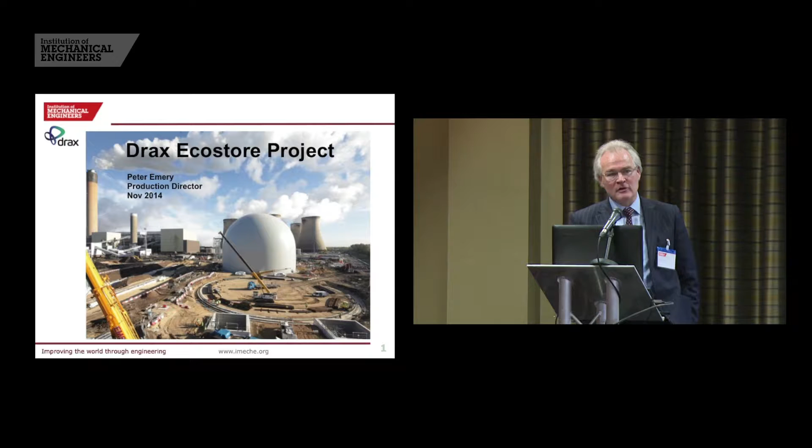So, a little bit about Drax as background. I started in 2005 because that's broadly when we really started the biomass journey. For those who don't know, Drax has 6 operating units, all 670 megawatts, making about 4,000 megawatts in total - twice the size of the next largest power station in the UK. In 2005, that was about 5% of UK's installed capacity, but because the station is competitive and efficient, it actually produces between 7 and even sometimes 8% of UK power. When all units are burning coal, it burns 10, sometimes 11 million tonnes a year, which in winter is 250,000 tonnes a week. CO2 emissions are between 22 and 24 million tonnes a year, and in 2005 that put Drax in the top 5 CO2 emitters in Europe.

As mentioned in the introduction, we floated the business in 2005, so we had to have a plan about what to do with CO2 when you've got a problem that big. We developed a business case for decarbonisation, which came down to a 3-phase strategy to deliver progressive reductions. The first was to improve the efficiency of the operation as best we could. The second was to progressively switch to renewable biomass from coal. The third was to explore the potential for carbon capture and storage. The plan was deliberately simple, and it largely remains intact today, 8 years on.

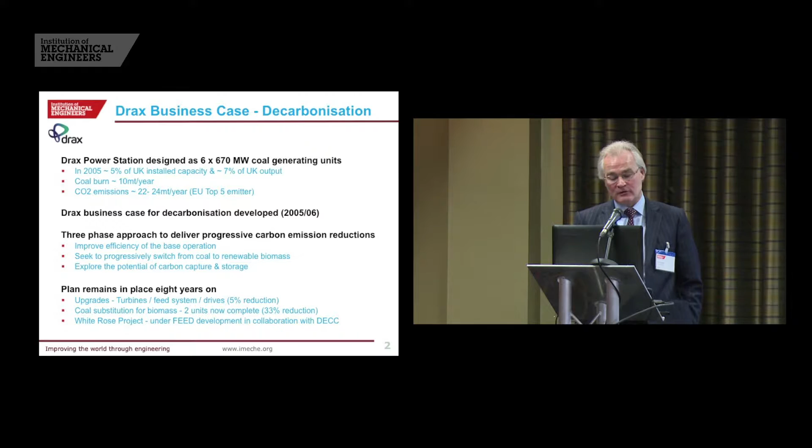Broadly speaking, that was our approach to trying to reduce carbon emissions, and we've had quite a lot of success. What I'll focus on today is the biomass piece of this.

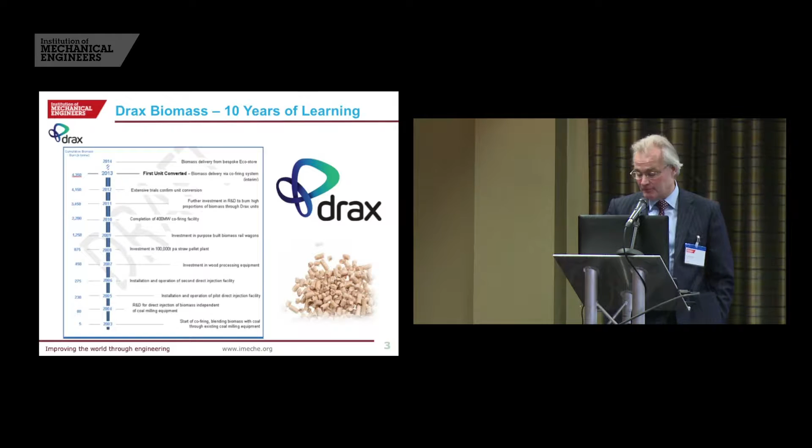So that's our experience on site prior to this project. In addition, Drax has also been involved in the supply chain. One thing about biomass is this is a relatively new business. There's very few people we can go to who've got a lot of expertise in this area. We're having to go to different people with different expertise in different industries, apply it to our own knowledge, and then build up a larger project.

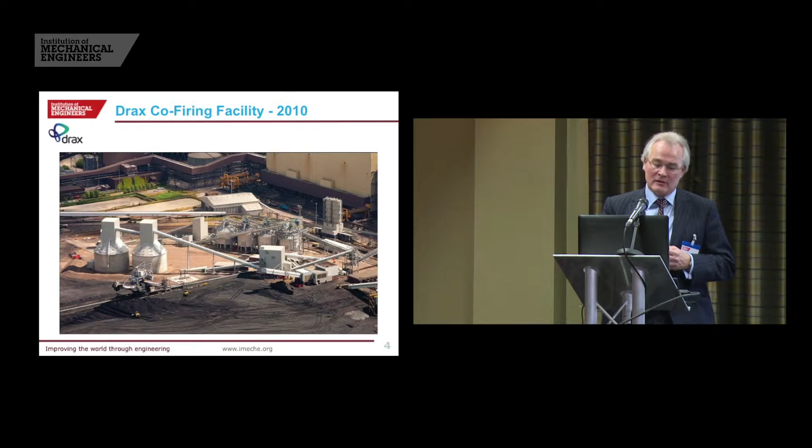Some of you may be aware that we are in the process of building 2 pellet plants in the US at the moment. In fact, we're commissioning one now. We've built a port facility in the US at Baton Rouge, and we've also collaborated with 3 ports in the UK to put in port facilities. Our expertise is a mixture of doing it ourselves and engaging in long-term collaboration agreements and contracts in this area, and we've learnt a lot from getting involved in all aspects of the business.

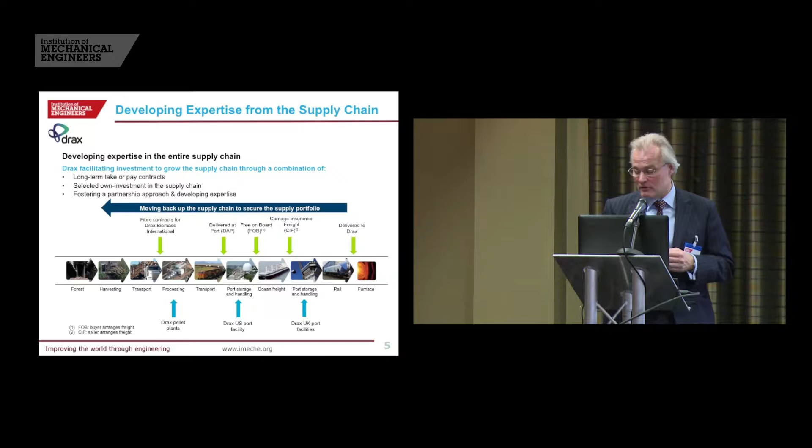The project is laid out fairly simply. We've got brand new rail receipt facilities, and we upgraded our entire rail network on site to do that - that was 8 kilometres of track. We've got a screening building which screens using magnetic separation and gravity separation. We've got then the 4 domes for storage, 75 to 80,000 tonnes for each dome. And we've got the retrieval facility taking it to our fuel distribution system. The rail loading and storage is all done by conveyor because of the capacity.

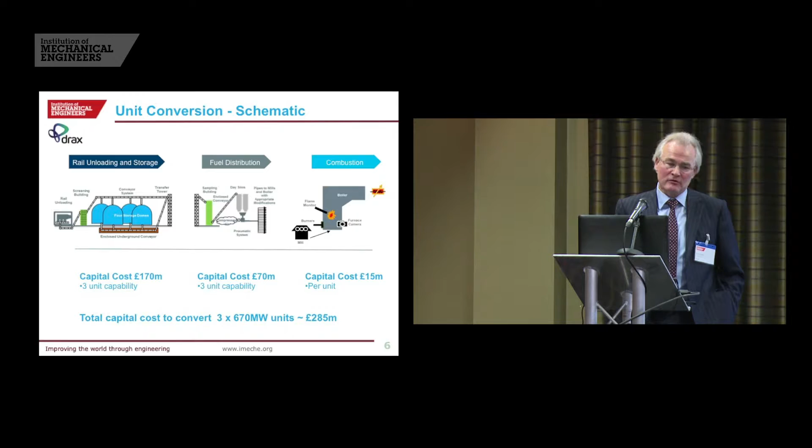The fuel distribution system effectively samples it, delivers it into day silos, where it then transfers to a pneumatic system for dust management, and from the pneumatic system it's then delivered to the boilers by pipe. Then it goes into the boiler, and we've had to do quite a lot of modifications. The capital cost looks small, which it is, but an awful lot of engineering time and effort has gone into making these changes not only effective, reliable and safe, but also improving the efficiency of the plant, because it's not designed for biomass, it's designed for coal. The big difference, apart from the particle size, is coal is delivered often wet and biomass is dry, so the heat integration issues are significant.

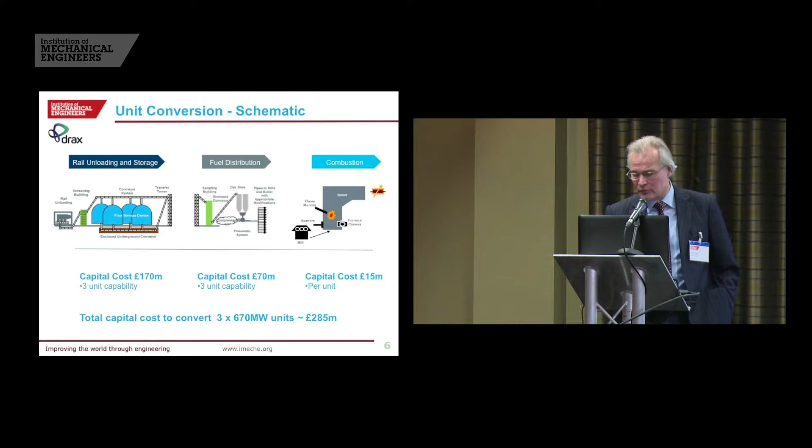To give context to the size of it, that coal stock - typically we operated between 1.5 and 2 million tonnes of stock. It actually did peak at 3 million tonnes in 1984 during the miners' strike, but typically it's between 1.5 and 2 million tonnes. So it is a large area, and that's been very helpful for us in developing the biomass project.

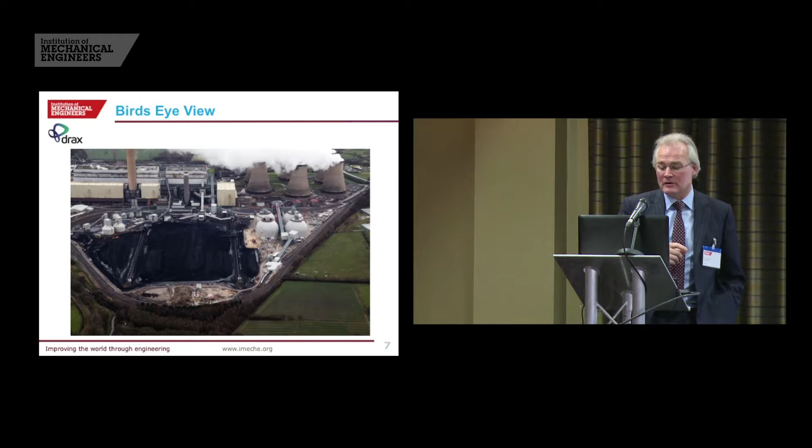So let's just look at the conversion plan and how successful it's been. This is the plan of the entire 3-unit conversion. We're now really 2/3, maybe 3/4 of the way through this.

We converted the first unit in April 2013. The second unit we converted in April this year, and next year, probably the middle of summer, we'll convert the 3rd unit. So we've commissioned all the common systems, that's now in place, and we've converted 2 units. And the project has been a success.

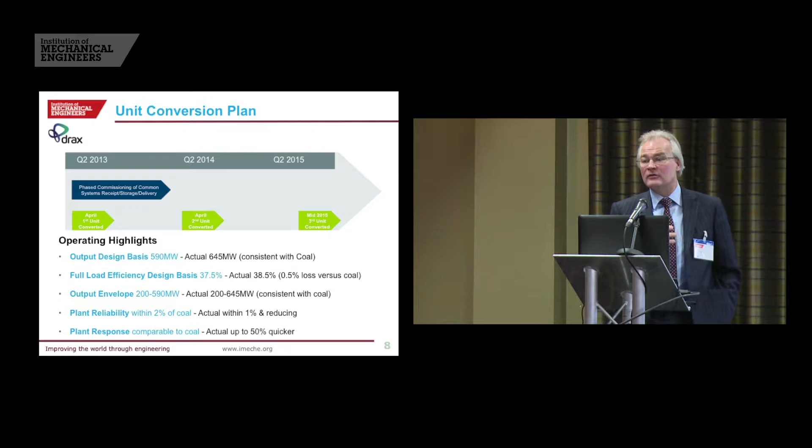One of the challenges was, can we get the same throughputs or high throughputs out of the plant, because we didn't want to lose that much capacity from changing from coal to biomass. The design basis was 590 megawatts. We've actually achieved 645, which is exactly the same as coal. The nameplate is 670, which is what it achieves, but when you take works power off, 645 is what you export. So the biomass units have actually met the coal units now.

The full load efficiency, we assumed a 1.5% efficiency loss, and actually that's only 0.5% now. We've also got some ideas how we can narrow that gap even more. So at 38.5%, our biomass units are more efficient than most of the coal units in the UK.

The output envelope we've managed to retain. Drax units are very flexible. They can operate between 200 and 645 on coal, and we've managed to achieve that on biomass, which is a great success, and already the National Grid use our biomass units to balance the system.

And the reliability, we're aiming to get within 2% of coal. Our units generally are first quartile performers in forced outage rate. We typically get between 2.5% and 6% losses on each unit, and the biomass units are within about 1% of coal at the moment, although it's still early days.

And the plant response, this is how quickly you can increase or decrease load. We tried in the design basis to make it comparable to coal. It's actually 50% quicker because the fuel is dry, and if you need to put more load in quickly, you can get fuel in very quickly through the mills. The boiler distribution system works very well, and we can get the fuel in very quickly. So actually they are very responsive units, which is a benefit we did not anticipate.

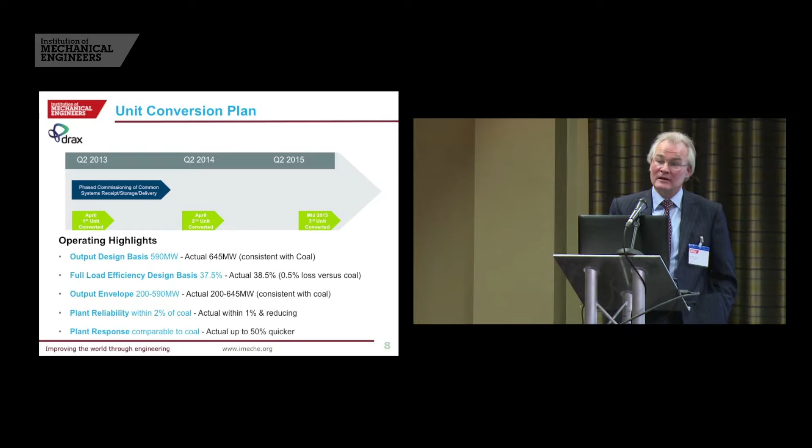So this chart shows the same layout that I described two charts earlier, but it characterises the challenges we faced. The purple ones are the common challenges across the 3 sections of the project. With rail unloading and storage, dust is a major issue. It's a dry fuel, that's different than coal. Fire control is a big issue for us.

Self-heating, many of you will be aware that biomass does self-heat. If you get moisture into it, it really heats up quite quickly, so you have to be able to control that. And also tramp material - that challenge is the same as with coal, but in biomass, because of the processing equipment, it's more delicate than some of the coal equipment we've got, so it's quite critical to us.

For the fuel distribution system, airborne dust, fire control and dry fuel are consistent challenges. We also moved to a pneumatic system, so it's really about controlling semi-dense phase flow of the biomass. It can be problematic, particularly as our pipe runs are different lengths, which causes quite a lot of work on how much air we need and what pressures to operate at. And also gravimetric control, how we feed the units in a controlled fashion, that not only has to work at steady state, but since we follow load and respond to National Grid signals, it needs to be pretty flexible.

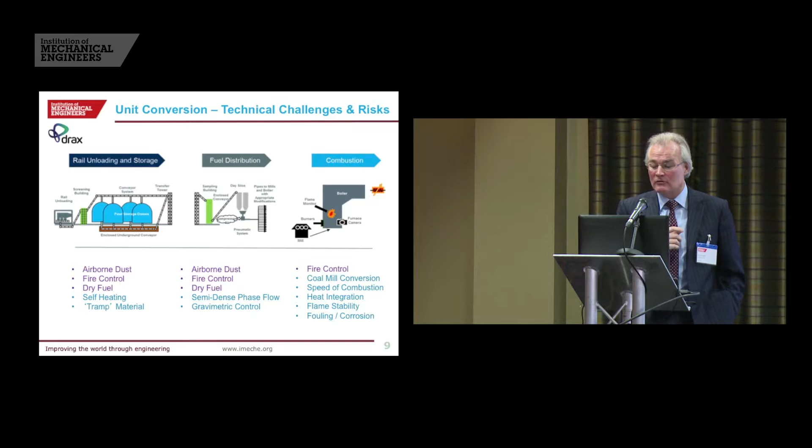The next two charts briefly look at some of the hazards. Some were mentioned at the earlier presentation, but creeping fires on horizontal ledges is a characteristic of biomass operations. If you don't control the dust, it builds up on ledges and horizontal surfaces, and if you're not careful, you will get fires.

The one on the right is the remnants of a storage fire in one of our rail silos. So storage fires and self-heating is an issue. When we went down this road, almost every operator we spoke to, in Scandinavia or mainland Europe, said if you're in the biomass business, it's not if you'll get fires, it's when. And if you're going to have fires, you've got to be organised to cope with it.

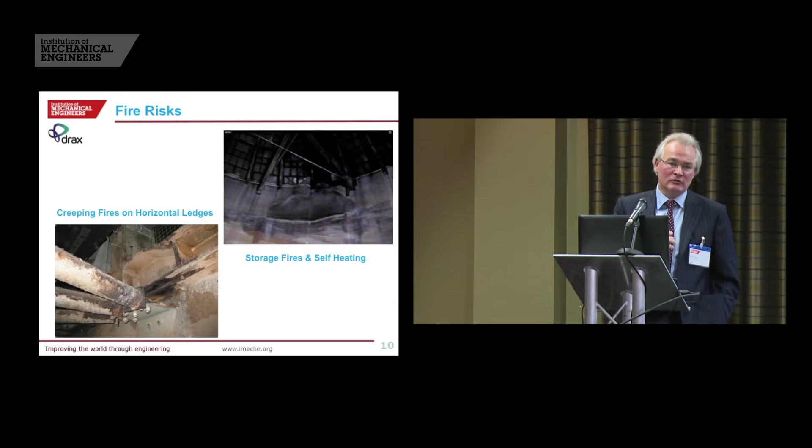And then the other area is dust. On the left you'll see a motor - if you're not careful, dust does get everywhere. You really have to get religion about managing dust if you're handling biomass.

On the right hand side we did some test work originally to see whether we could use biomass in our existing coal bunkers. We brought in a couple of vendors to show what their chutes could do in terms of dust mitigation. This is one of the efforts - my team sat down, watched the video, and within 5 minutes we just couldn't contain ourselves. We spent the whole morning laughing about it, and we decided we can't use coal bunkers. You just can't do it. So that's why we used a pneumatic system.

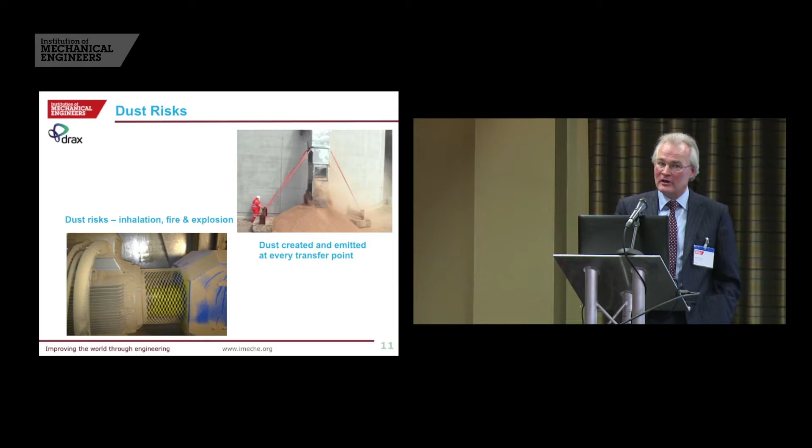But simple practical tests showed what was possible and what was not possible. So, a little bit more detail - for us, biomass to coal is not just a fuel switch, but it can be. So you've got to treat this very seriously. You can handle it safely if you use systems that really focus on what the risks are.

So biomass, low density, must be kept dry. Transport and storage must be designed accordingly. I'll show you later one of our rail wagons - the rail wagons are there to handle the density. Clearly we've put the domes in place, and all the rail wagons have got roofs on. None of that was in place with our coal operation.

Eliminate airborne dust at every opportunity. We've really attacked it from every angle - we've worked the fuel specification on the pellets to try and minimise the amount of dust. We've modified our conveyors and transfer points, and our rail receipt facilities, again to minimise dust. We've also extracted dust at every opportunity and not put it straight back onto the biomass.

When we extract the dust, we then take it straight to the pneumatic system. So at every stage of the system we extract dust and don't put it back in, which really helps the process. That was new for this project - we'd never done it before, and it works really well.

And also isolate wherever possible. All our conveyor belts are enclosed, but they're also easy to clean, and our pneumatic systems just keep it trapped inside the pipe. We didn't want any dust in the boiler house at all because of explosion and fire hazards, so the pneumatic system was the obvious solution. The bulk storage needed careful management - it's been quite innovative what we've done at Drax.

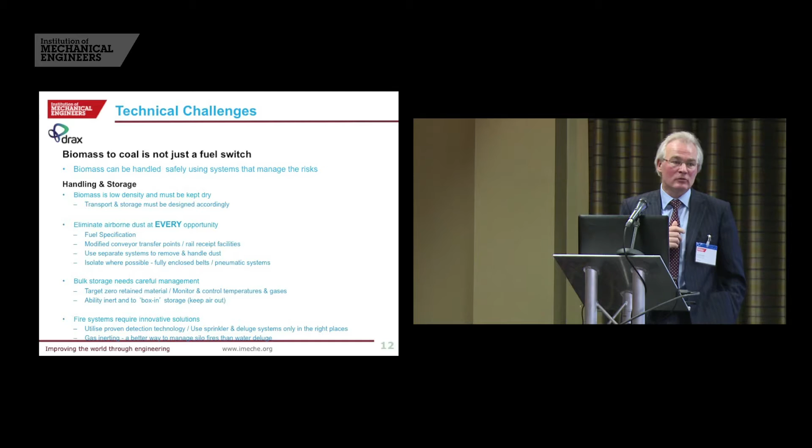So you have to be very careful about targeting how you detect fire and then how you attack it. On the combustion side, won't spend too much time on this, but chemistry is key, and that's back to the fuel specification. We also add a mitigant to the biomass in our boilers to try and reduce the effect of fouling.

The heat integration, I briefly mentioned earlier. We did a project to take heat out of the coal mills to try and reduce the temperature in the mills, which we achieved well, so the biomass didn't just combust within the mills, and then use that heat for the feed water heating system. We saved about 1% of the energy loss by doing that modification.

The milling plant we had to modify. Coal is a friable substance, biomass is bouncy and resilient, so how do you solve that problem? That's really getting the pellet specification right, the particle size right. All we really do at Drax is break those pellets up. All the milling is done off-site where you produce the pellets in the first place, and this pellet specification was critical to that, but also the residence time in the boiler.

Every now and again you need a lucky break. Drax boilers are very big because Selby coal was so poor quality and caused a lot of fouling. Our boilers are large, and because of that, we have got more residence time than most other coal units, and that helps the biomass burn in time before it goes out the back end.

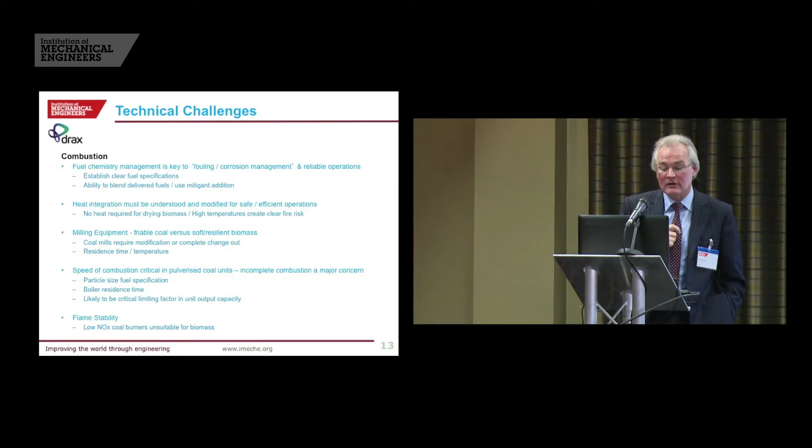So speed of combustion is critical to us. And then finally, flame stability—we've had to modify all our burners.

Just a couple of examples of the chutes. On the conveyors, we've used this Tunra chute design. This is an Australian vendor, designed for the minerals and mining industry, really to reduce wear and tear on conveyors and also minimise dust. It seemed the ideal design for us from our own experiences, and what it does is sculpture the flow of biomass from one conveyor to another, really minimising the shock loading, and reducing the dust production significantly. We've been very pleased with that technology.

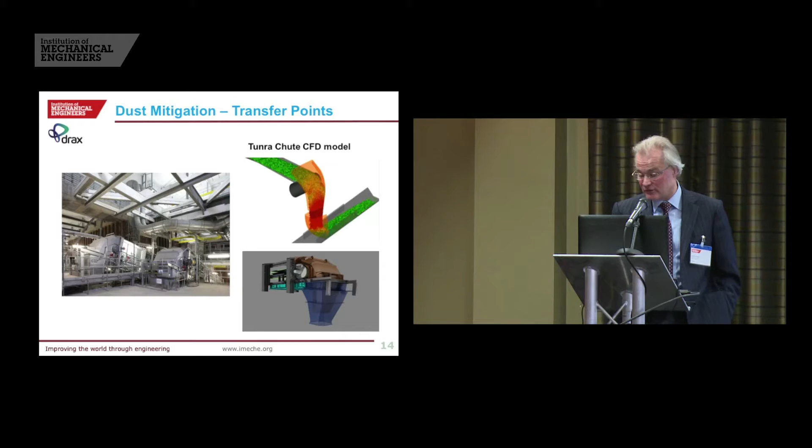If we look at dust, we tried to minimise flat horizontal surfaces wherever possible. You can see these are simply polystyrene cones, almost like Toblerones, that we put on top of girders so that dust can't gather on the girders. A very simple modification. People always remark on it when they see it—it does look unusual, but it works. Dust does not settle on horizontal surfaces.

All our buildings, we don't leave building internals exposed. We cover them up so they have clean surfaces so the dust doesn't stick on it, and all the cable trays are made of wire. There are no solid trays, again, so dust doesn't gather anywhere.

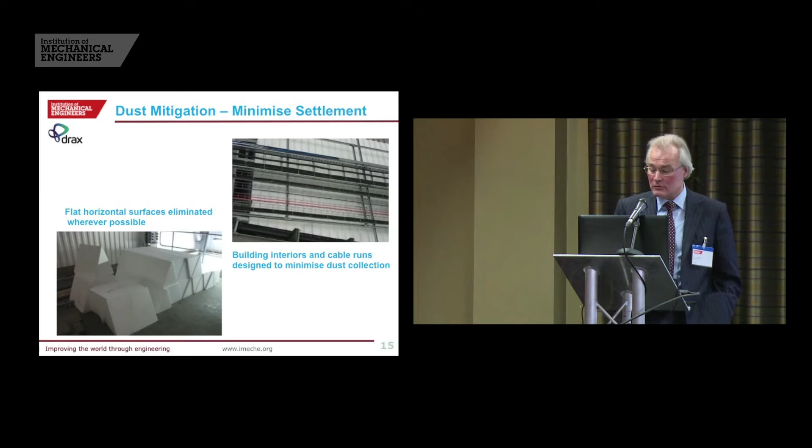Fire detection—we use infrared technology, which won't surprise you, but we use different technology for our conveyors, looking at solid beds, which then trigger our fire systems. On the chutes, we use a firefly system where it detects any fire and then is extinguished immediately with a water mist. This works really well, and so far, in handling best part of 4—well no, now nearly 6 million tonnes gone through the system—we haven't really had a single fire problem at all.

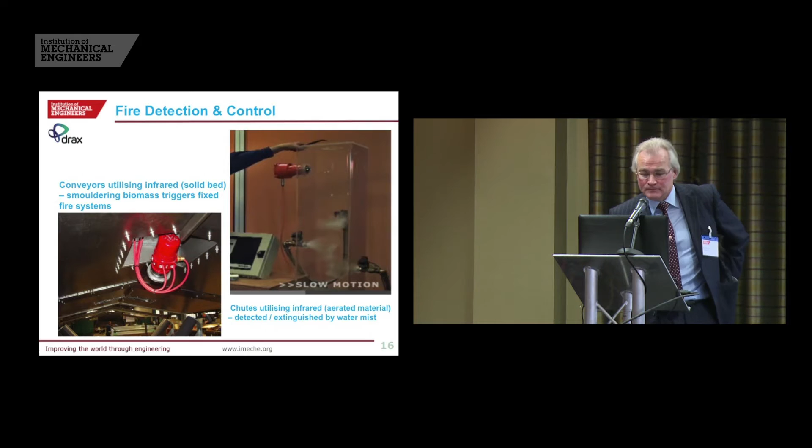The dome inerting has been a real success, and I'm sure John will talk about this afternoon. On the right we've got a diagram of the nitrogen system. Basically the nitrogen feeds up through the floor. We fill the dome with 20% biomass, and then we flood it with nitrogen. It flows between 1,200 and 3,000 metres cubed an hour and takes about 24 hours plus to get the oxygen levels down to negligible amounts. We use 93% pure nitrogen, so it's industrial grade.

This works well. Since we've done this, we don't get any temperature deviations in the biomass at all. It keeps the temperature absolutely rock steady, which compared to our other facilities is a different world. So this has worked very nicely for us, and is probably one of the major successes of the project.

We've also got CO2 facilities in the head houses of the domes to deploy should we get into a fire situation.

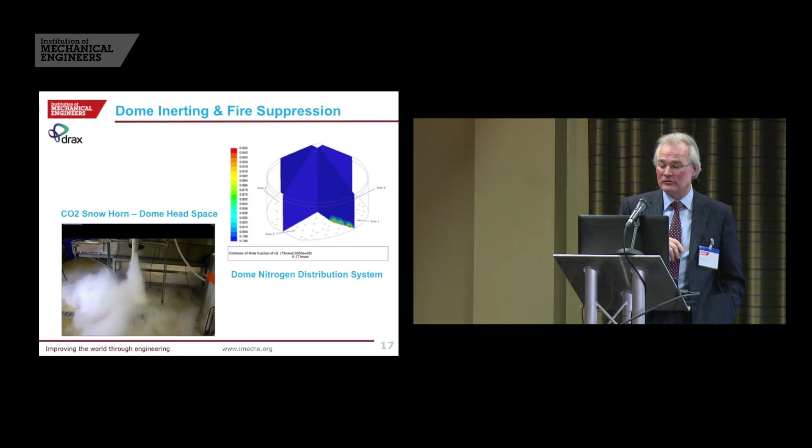This just shows a couple of pictures of things I've talked about. So obviously the dome's top left. Top right is the inside of a dome, which has a W profile floor. There are 2 conveyors running in parallel at the bottom of each of the W's, and you can see the vibrating floor panels, which we only operate as we come to empty the bottom of the dome out. Without the vibrating floors, there'd be about 15% of biomass left in the dome. With the vibrating panels, we can empty it almost completely before we refill it, and that's the cycle we use. Bottom left is the nitrogen system, which basically uses basic sieve technology.

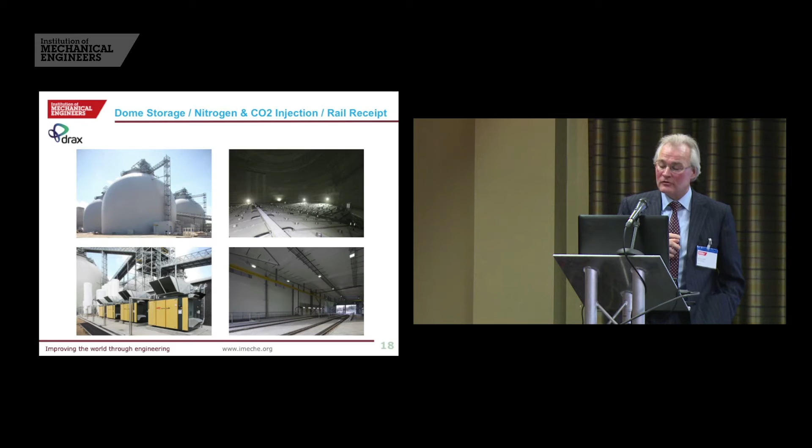The next area was the transfer from conveying technology to pneumatic conveyancing, which was new for Drax. We haven't got much with this, and this is basically a three-stage airlock system. Again, quite commonly used, not unique in any way — it's just the scale of it at Drax. We've used a Schenck system. It works well. You can see the air blower at the bottom, the airlock system on the left.

The transportation lines vary from between 100 metres to 300 metres in length, so there's quite a big difference in performance. In fact, we need different size blowers to handle the different runs. At the other end, you've got a rotary valve which separates the pneumatic system from feeding the biomass straight into the modified coal mills. So it's a very simple process. We have 10 mills on each unit, so we have 10 separate systems for each unit. For 3 units, we've got 30 systems like this, all built in a tower.

Some practical solutions here: having the pipes outside means the fire risk reduces and dust risk reduces. We've also got the ability to get access to all these lines every 25 metres, so if a pipe blocks, we can get in there and unblock it very quickly. We can manually open these pipes every 25 metres, which is a very practical solution, and during commissioning that was helpful. As we optimise the blowers and try to reduce power consumption, every now and again they block up, so getting access to unblock them easily is very helpful.

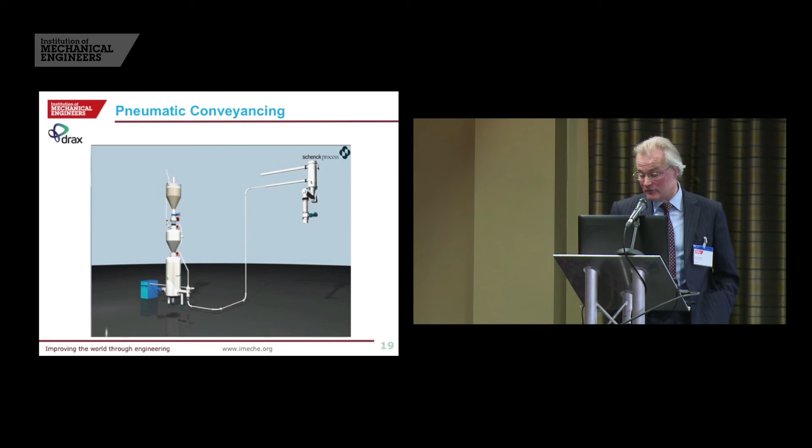This picture shows the 2 big hoppers in the middle. This is where the conveyor system drops into 2 main day silos, and then into the pneumatic system, which I've talked about with the Schenck airlocks.

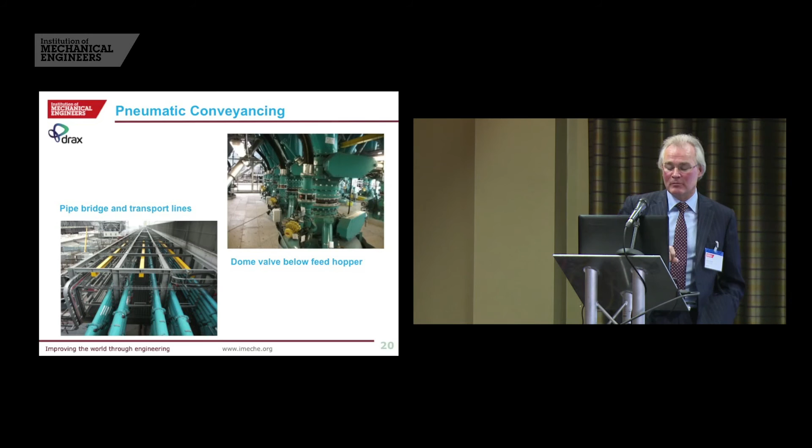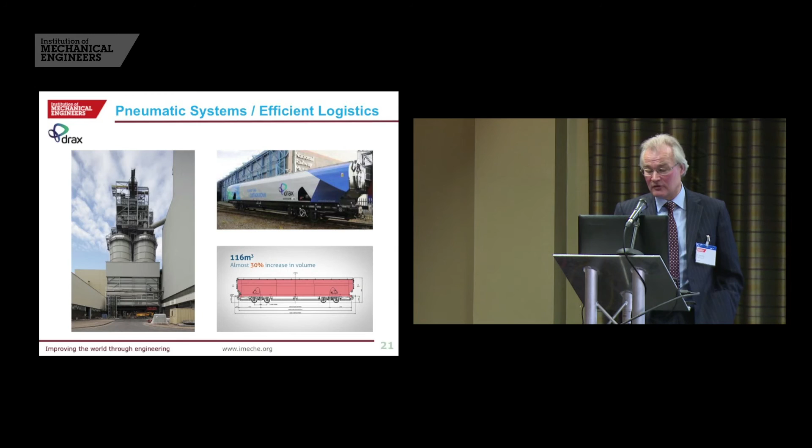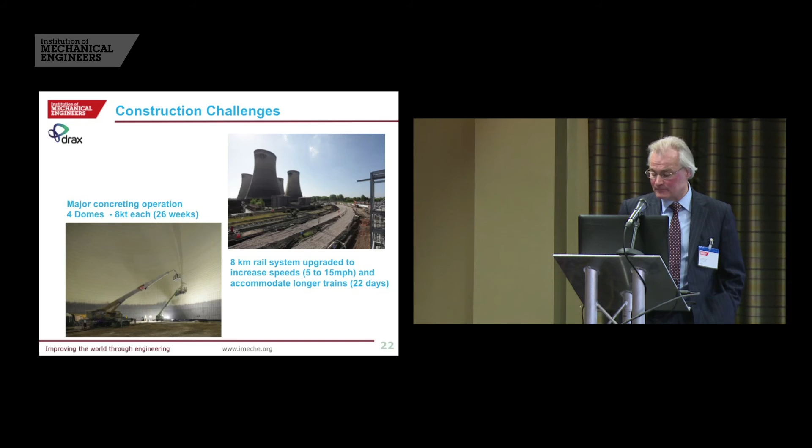So just to conclude, the project is really the culmination of 10 years' work. We've had a very committed group of engineers at Drax working on biomass throughout that period, and they've come up with quite a lot of innovative solutions.

We've also had, as you can imagine, an awful lot of people telling us what we should be doing, and a lot of it has been based on very little experience. So we've used third-party expertise, but applied it with caution. One of our guiding principles is that as a business we try to keep certain core competencies in-house, and I think this has paid off for us.

When we went with Shepherds for this project, we were very careful in the selection of our construction partner. We wanted somebody that would collaborate and learn with us, and that has gone well. And I'd like to thank John and his team for all that they've done for us. I think the focused effort has delivered results.

The project's largely successful. We've done two plants. The design basis has been met, and the third one will be done next year. But the important thing to say is that lessons still remain. We have achieved a step change in dust management, but regular intervention is required now and again, particularly if we get a very dusty cargo. People don't always stick to the spec, which is something else we're working on. So you have to be on your guard.

We've also identified several improvement opportunities already, and full throughputs will be achieved by the end of next year. So we aren't quite there yet - we're 2/3 of the way through the project.